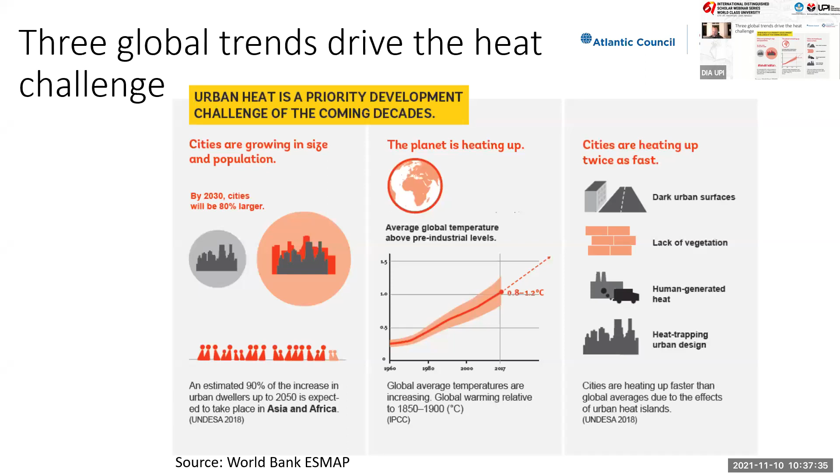And this lack of access to cooling, and by lack of access to cooling, I mean two things here. First, there are those that are economically able to purchase an air conditioner and run an active air conditioning unit, something that takes electrical power to operate. And in that category of access, we face one particular challenge, and that is powering those units going forward.

You can see here, this is the projection for the global air conditioning stock that was developed by the International Energy Agency in their Future of Cooling report. And to meet the demand, if we were to actually install this many air conditioners over the next 30 years, we would need to build the electrical generation capacity that we currently have in the US, Europe, and India combined. So we're talking about a multi-trillion-dollar set of investments to simply meet the expected demand for air conditioning units that we have currently.

And that's if you're lucky enough to have the economic capacity to buy and maintain and operate that air conditioning. On the other side of the equation, we have those that are not economically able or don't have access to stable electrical power to operate active cooling systems. And here we're talking about over 1.1 billion people who don't have access to those solutions and will need some other sets of solutions available to them to survive and thrive where they live. And for that, we mean most likely passive cooling solutions.

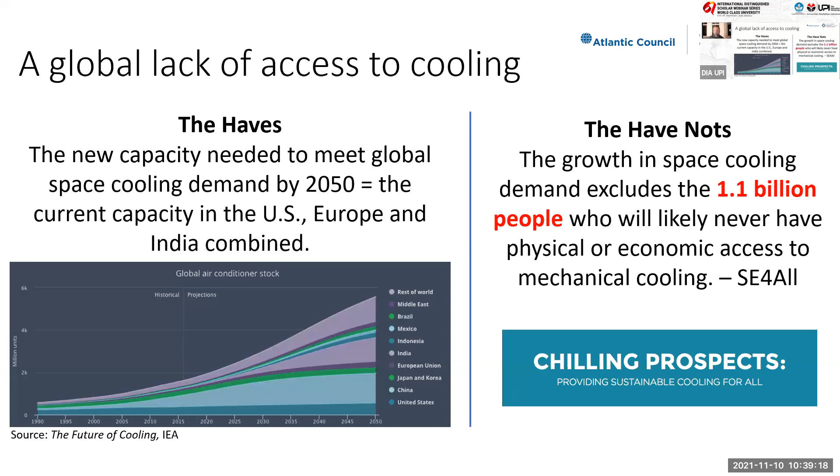So it's a huge global problem, and it's also a dire one from a couple different avenues. And so I'm going to talk through a few of these particular challenges that heat generates. But I want to make the general point that if you think about an urban system or a community system or a human system, there aren't many systems that we deal with on a regular basis, in our economic system, in our agricultural processes and so on, that rising temperatures and extreme heat aren't having a negative impact on.

So I'm going to focus on a few, but please keep in mind that this is about as broad a spectrum of a challenge as we face in the global context today. So I'm going to start with the sort of economic piece of this. And this is from, on the left side here, a report published in the journal Nature Climate Change back in 2017. And you can see the title there.

And it was a really comprehensive review of close to 2,000 cities around the world. And what they looked at was the cost of unchecked urban temperatures and local climate change impacts. So essentially, what is the cost to not doing anything on heat? And what they found was that by 2050, the median city in their study would face about just under 2% GDP. It would cost them 2% of their GDP annually to deal with the lack of action on those challenges.

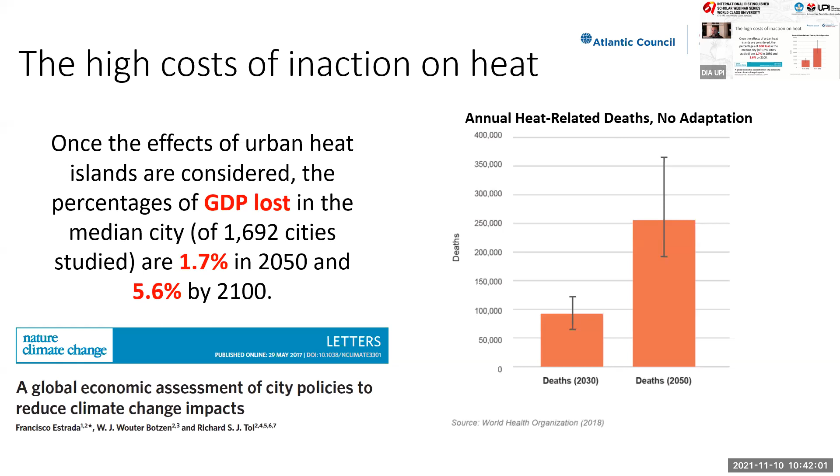So just to frame the top line of this, I also want to talk about air quality, since that's a big piece of the health component here. If we think about how air quality is impacted by heat, it hits in two different ways. The first is higher temperatures increase demand for active cooling, air conditioners, and other sorts of space cooling measures, which in turn increases electricity demand. So depending on the mix of electrical generation, this will increase the emissions of ground level ozone, sulfur dioxide, nitrogen oxide, carbon monoxide, and a variety of fine particulate matter and other pollutants.

And to the extent that those generation facilities are closer to cities, those impacts will be worse. This effect on air quality is most pronounced in cities where that power generation is close to them. Heat also helps activate some of these precursor chemicals in the atmosphere. So you see more smog being formed and more ozone being formed on hot days than you do on cool ones. The other aspect of this is urban design that blocks wind.

So one of the key factors driving urban heat islands or elevated temperatures in cities is the fact that we are blocking wind with our human development. We build tall buildings that block the wind. Therefore, we slow down the wind within the urban core, and that makes it harder to move the air out of the urban core and into areas of lower concentrated population. And so these two factors together, one in direct relation to heat, one a factor that causes urban heat, are two major reasons why we see air quality being reduced as a result of rising temperatures.

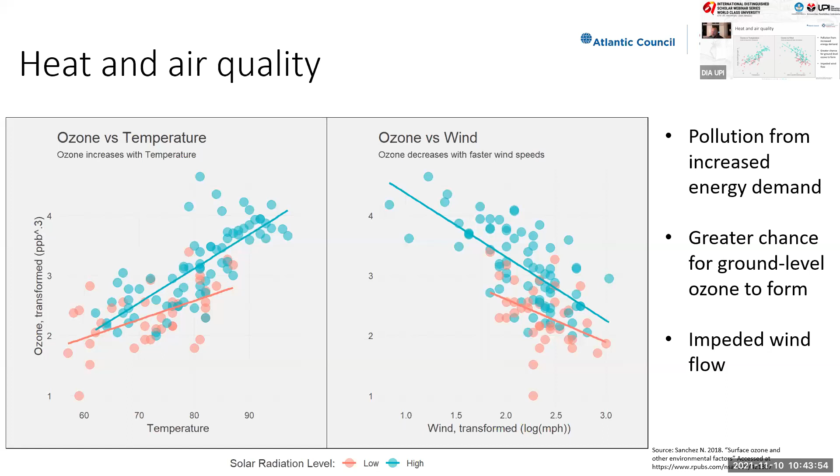Okay. So I also want to talk about the energy system. What you're seeing on the left here is a graph from Shanghai, but any city that has substantial air conditioning penetration looks very similar to this. And what you're basically seeing is around, in this case, 23 degrees Celsius. Now that threshold will shift depending on the city, but generally in that range of about 19 degrees Celsius up to about 23 degrees Celsius, you've got a fairly flat use of electricity in the average city.

Sometimes you do have a little bit of a bump towards the lower end if the city is a cooler climate. But right around that 23 degree threshold, we start to see rapid increase in air conditioning use and therefore energy demand, electricity demand.

And as you can see here, as excess urban heat gets more intense in the coming decades, the electricity demand in cities will grow and affect electricity costs and system efficiency. And going back to that IEA report, The Future of Cooling, by 2050, we find that up to 40% of peak load in places like Indonesia, as you can see circled in red here, will actually be from cooling. So this will be a major piece of the electrical infrastructure challenge that Indonesia and others in South Asia, including India, will face going forward.

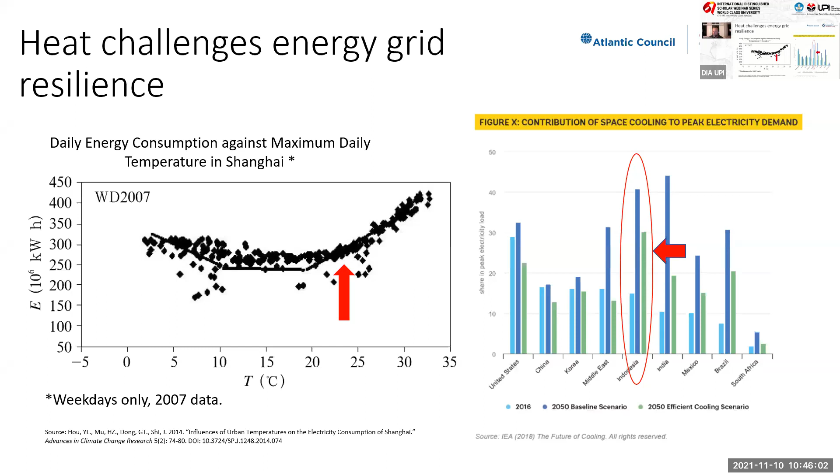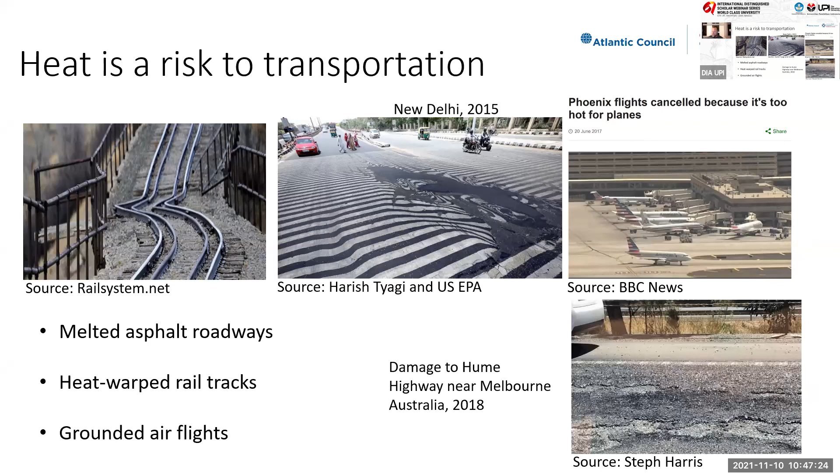And throughout this, the items I've highlighted here and the broader spectrum of economic and health and other implications, I want to be clear that this is an asymmetric impact. It's not happening to everyone equally. It is primarily affecting those that are most vulnerable, those that have the least resources and capacity to adapt to these higher temperatures. And so this is also, among other factors, driving global inequities, because the impacts are being faced most by the people who have the least capacity to absorb them. So as we're making changes in our built environment to address this, we're also indirectly and directly shrinking that inequity gap that we have in every country around the world.

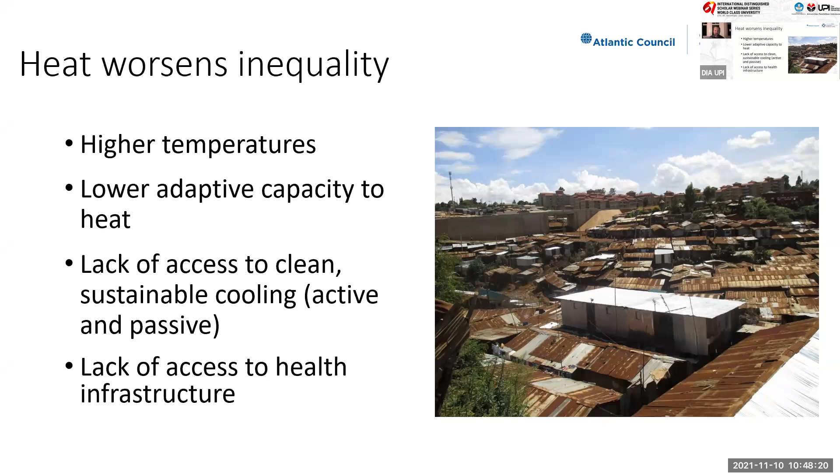So I now want to turn to the good news portion of what I wanted to say today, and talk a little bit about the cooling strategies that are currently available to us. And before I jump into that, I want to make the point that many of these strategies are based in ancient practices. They have modern application and they have modern technology that supports them. But many of these are part of the way we used to build our communities and build our cities, adapted for the modern age. And so we're in some ways coming back to a building style that served our ancestors well.

And I also want to point out that I'm going to be talking mostly about those higher tech solutions here, but that within each of these categories, there are often local solutions that can be adopted that serve the same purpose. So as an example, when we are talking about a cool roof or lightening the color of a roof, we're often talking about certain coatings and certain high quality paints or other types of applications to the roof. But you could also include a lime wash that you replace every year, or in India, for example, the use of cracked porcelain to help reflect the sun's energy. So while I may be covering more general technologies in this space, in many cases there are vernacular and traditional options that are available that are often less expensive that are important and applicable here.

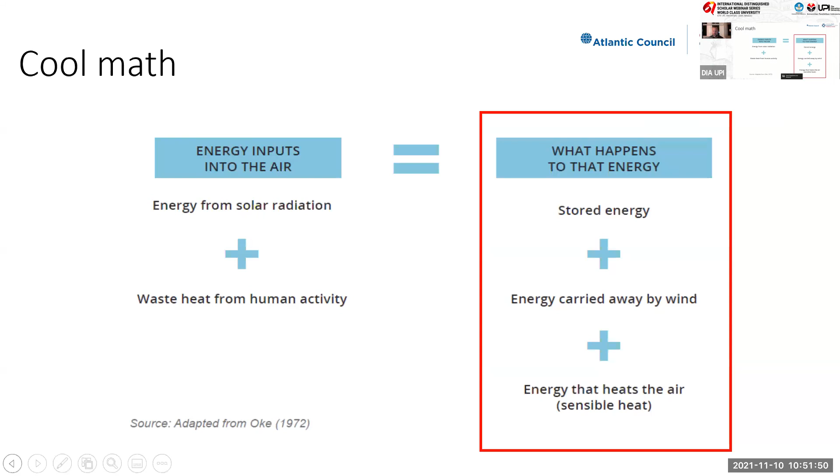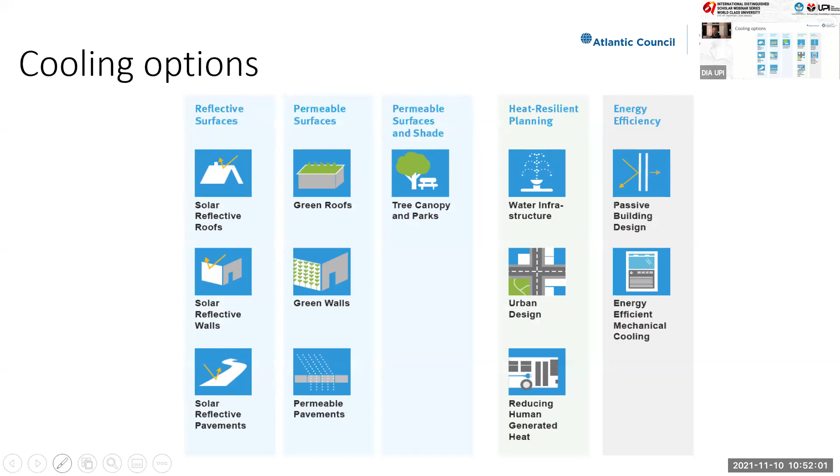And so again, I want to highlight a few of the measures that we have out here, and I'm going to break them into two major buckets. The first is, here we go, what I'll call passive or non-mechanical cooling solutions. Just the other day, I heard someone describe this a little differently, and I actually like the way they described it. So one other way to think about this is, what could we do outside of our building to improve the inside of the building and the urban air temperature? And then we also have the active cooling, which is what we can do on the inside of the building to improve its thermal comfort.

And so in the context of the first section, the passive, or let's say outside cooling solutions, we've got a number at our fingertips here. First is increasing the ability of our urban roofs, walls, and pavements to reflect rather than absorb solar radiation. That's what we're calling reflective surfaces. We can increase the amount of vegetated cover and tree canopy, which is the shading and permeable surfaces there in the middle box. We can increase the number of and accessibility to natural and man-made water features, either through fountains or by revitalizing or utilizing existing natural waterways, which is listed here as water infrastructure.

And then finally, on the passive side, thinking about our urban design. So designing our urban spaces so that they minimize heat buildup and heat retention, and maximizing wind flows through our cities, and calling that here urban design. Another piece that I included in passive design is related to energy efficiency, and this gets to some of the challenges that we see with increased electrical use, and helping to minimize that need to turn on that air conditioner that would then drive waste heat and additional greenhouse gas emissions.

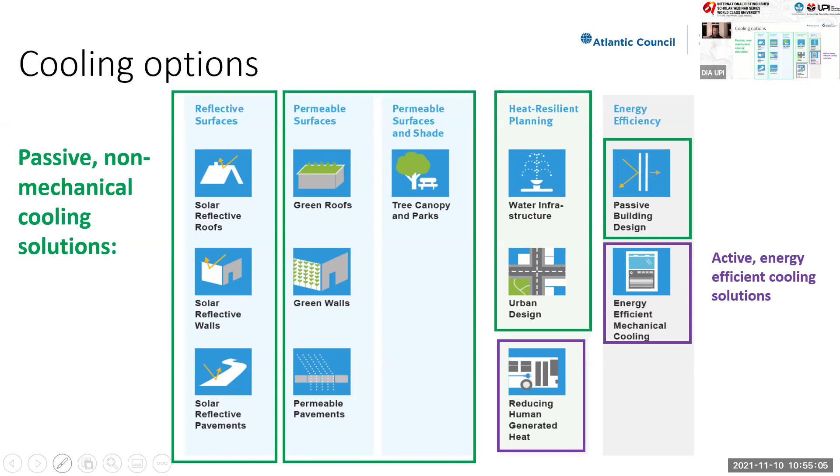So I won't go through each one of these here, but just to say this is drawn from the primer on cool cities that was mentioned earlier on. There's a couple points I want to make here, though, at the general level. And the first is that these solution sets are common across the world, that this is sort of the menu of solutions that we're going to be building our local cooling strategies around.

That said, each of these is going to be more applicable in certain areas than others. And so the mix of these solutions will differ by location, in some cases even within a city. So I think we understand at a broad scale what the opportunities for cooling are, what the solutions for cooling are, but then there is still a need to understand what is the right mix of those solutions to apply in our communities. And I'll talk a little bit about those considerations as we go.

But one thing I do want to point out is that no matter where we are, in humid tropical areas, in dry desert areas, in a four-season climate where you have a cold winter and a warm or hot summer, these solution sets apply. They all have different performance levels, but they will generate cooling benefits in each of those different varied climates.

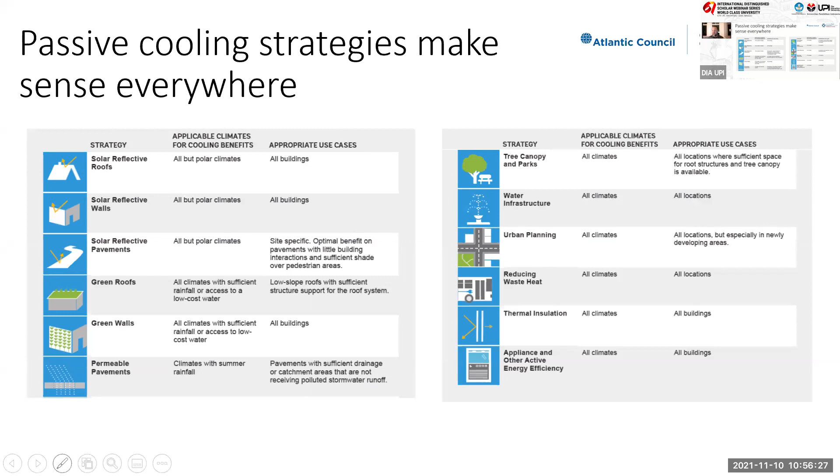So now I'm going to just take a little bit of a deeper dive into each of these opportunities and how they work. So I'm going to start with this idea of solar reflectivity. And so the concept of creating cooler structures using the surface's ability to reflect sunlight and to efficiently emit the absorbed heat was applied on buildings going back thousands of years. There's examples of this in ancient Sumerian architecture, ancient Egyptian architecture. Certainly, if you've seen any photos of the Greek islands and the buildings built there, you'll see it there too. So this is one of those ideas that is not new as a concept.

And this is how it works essentially. So every opaque urban surface, the roof, the wall, pavements, they reflect some incoming sunlight, and you can see that here, this little bar. So in a dark roof, the portion of sunlight that's reflected is relatively small. And when it is reflected, it is reflected out into the sky and ideally through the atmosphere and into space. And so this is essentially reducing the amount of the sun's energy that's absorbed and turned into heat, if you will.

And on a dark roof, we can see that actually two other things will happen relatively more frequently here. The first is that solar energy will be absorbed on the surface of the roof and then be re-emitted as heat that will warm the building, warm the area around the building, and warm the atmosphere above the building. And there's a wide variety of interactions that occur here, but essentially those are the pieces that will happen into the ambient outside air as a result of the solar energy being absorbed.

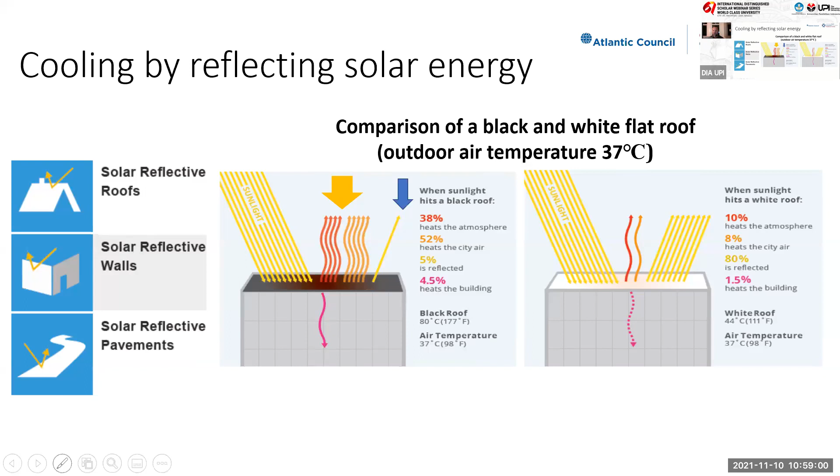And so the idea behind increasing reflectivity is to get to the graph on the right-hand side, which is to say the same set of interactions, reflectivity, absorbing and re-emitting into the air, absorbing and emitting into the building, but we're increasing the relative amount of that solar energy that's being reflected out into space rather than affecting the local area. And this can have substantial benefits that we'll talk about in later slides here. In fact, we'll talk about it in this slide.

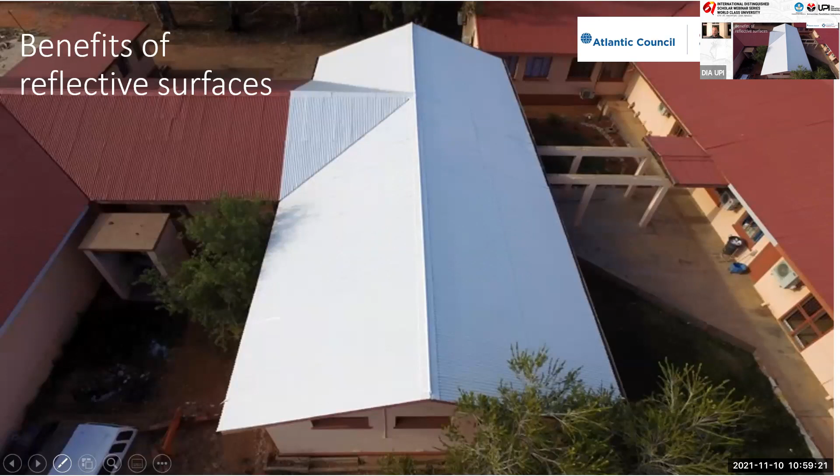So what you're seeing here is a school in Northern Cape Province in South Africa in a community called Kais. And so I want to talk a little bit about just in general what we see as the benefits, and they really span from the building scale all the way up to the global scale. So the first is reflective surfaces are applicable on nearly every type of roof, whether it be steep or flat.

There is some alternative roof that can be made cool or made reflective, with the exception, I believe, of thatched roofs, which are already cool, at least for the inside. But for just about every other type of roof, whether it be metal, asphalt, tile, there are options that can make that roof cool.

When we have active cooling, in all but the coldest climates, solar reflective roofs can reduce the net cooling energy demand by between 20 and 40%, and potentially more if they're paired with cool walls. And you can actually see at the very bottom of this picture that this structure has, at least in some cases, light colored walls as well.

So in warm US climates, we found that cool walls lowered annual heating and cooling energy costs by about 8.5%, which is a little over $1 per square meter in single family homes, and just about $2 per square meter, or 4.2%, in medium-sized offices. So these can be substantial benefits in terms of energy savings, and these apply even into colder climates in the US and elsewhere.

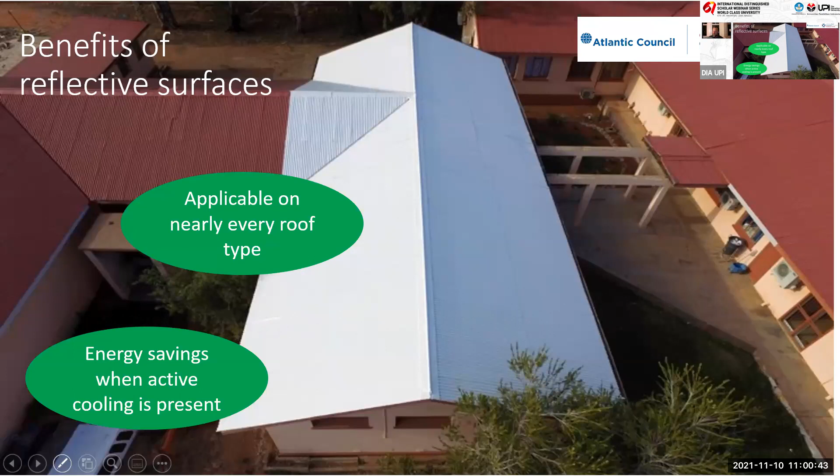So in terms of the cost effectiveness, the primer actually has some updated numbers from around the world in terms of cost, and I think Professor Paramita could probably speak to this with great accuracy for Indonesia. But what we find is generally for almost all of the cool roof options, the upfront cost premiums, while they'll vary, are fairly low. Although I will say in new markets, these cost premiums are still a challenge. But as we see more and more adoption of cool roof policy and others, we've seen steadily that costs can come down to being neutral with existing solutions, or in some cases actually less expensive than existing options.

In general, what we see in a developed market for cool roofs, like Australia, Europe, North America, is that the payback for applying a cool roof is anywhere between 0 to 6 years, based on the energy savings alone, not even looking at the other broader societal benefits, or even in some cases valuing the peak demand benefits in the electricity. So this is really just looking at demand reduction overall.

And I alluded to global cooling, and so I want to explain that briefly here. A large-scale shift towards reflective surfaces could immediately cool the world by reducing the amount of heat that is transmitted from the Earth's surface and trapped in the atmosphere. So basically taking the method by which reflective surfaces cool and translating that into the amount of warming that is generated by atmospheric greenhouse gases. So if we're considering changing a dark surface to a light surface, that cooling effect can be thought of as equivalent to a warming effect from greenhouse gases that have already been emitted.

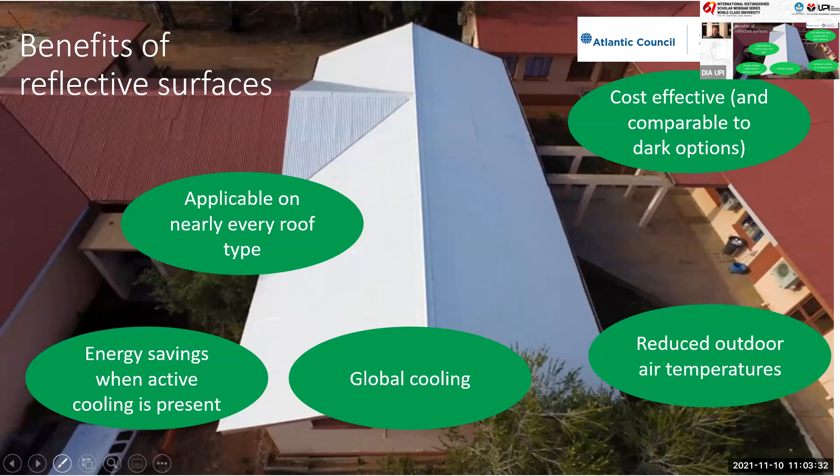And finally, reduced indoor and outdoor air temperatures. I want to make sure I get both of those on there. We talked a little bit about that in terms of the numbers around this. On average outdoor air temperatures, in studies that we've seen, for every 0.1 or 10 percentage point increase in reflectivity, we can reduce outdoor air temperatures by about 0.3 degrees Celsius. And to give you a sense of what a 10 percentage point increase in reflectivity looks like, that would be a change from a dark gray to a slightly lighter gray. This is not going from black to white.

So when we look at this overall in the cities where this has been studied, a reasonable deployment of cool surfaces in a city, by that I mean not the technical potential, but what can be done realistically, could reduce urban average temperatures by about 1 degree Celsius. That may not sound like much, but that is a substantial amount of cooling when you consider that against the warming that has occurred on the global average basis. We're a little over 1 degree Celsius now.

So reducing our urban temperatures by 1 degree Celsius on average essentially, and again, this is rough terms, essentially negates the effect of warming that we've felt over the last 100 years since the Industrial Revolution began. So it is very substantial.

And then the other piece of this that's important here, this 1 degree, and why it's an important number, is that when we think about the effects on the energy system, the effects on the health system, and the effects on air quality, as you saw, they weren't linear. They get to a particular threshold, and then every degree change over that threshold temperature is a substantial increase. So once we're over that threshold temperature, these types of reductions have an outsized benefit in the communities where they've been applied.

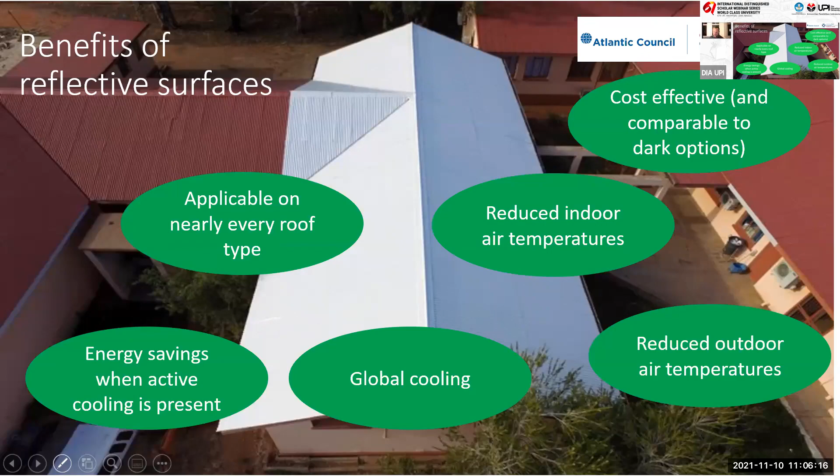Now, of course, as I mentioned a couple slides ago, there are always use case considerations to think about here, and that's certainly true for solar reflective surfaces. The first is, especially in cooler climates or four-season climates, you can have some additional heating demand that's generated as a result of applying cool surfaces. So you're cooling in the summer, but you're also cooling a little bit in the winter. This, generally up into the very northern Arctic parts of the world, is still a net cooling benefit from solar reflective surfaces; you get more of the benefit from reduced summertime temperatures than you have penalty in the winter. So this is generally an overstated challenge, but is one to consider depending on where you're applying these.

The other aspect here is the reflectivity of a surface changes over time. So the surface gets dirty. There's biological growth that can occur. Dust from sandstorms, things like that, can reduce the initial reflectivity. So what we see in international codes that have mandates for reflectivity, in some cases they actually specify an aged value rather than an initial value to capture this.

What we generally see in the U.S., where we're looking at biological growth, industrial emissions and their effect on the roof, and desert conditions, is about a 25% reduction over about 3 years. And then it stabilizes after that. So as a rule of thumb, you could consider about 25% reduction if the roof isn't regularly washed, or, which we actually see more frequently, if you have rains that come through on some basis, that will generally clean the roofs as well. So you may not lose as much if you've got an area with regular precipitation.

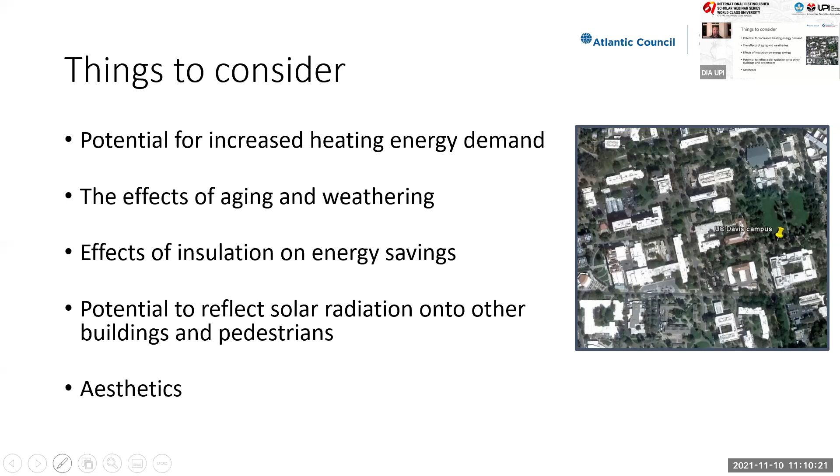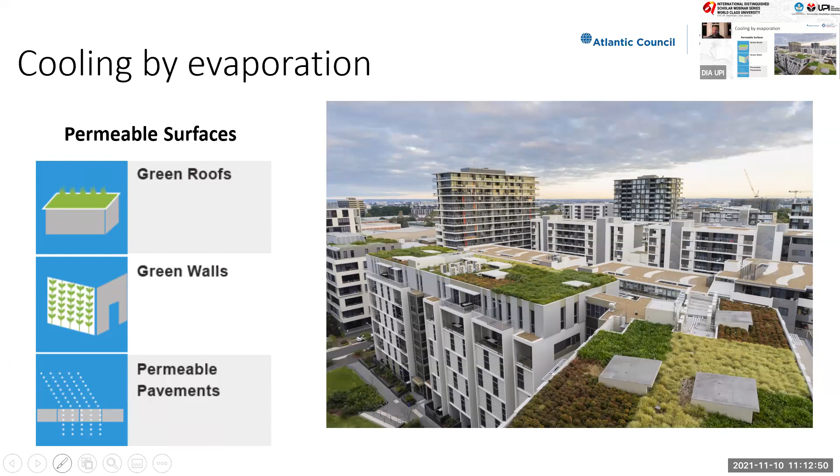So we'll get to this in the consideration section, but there's obviously a number of things to think about as you're planning out a green roof or a green wall. And we'll get into that in a few minutes. But plant selection in this context is I think particularly important, especially given the fact that we're living in a changing climate. And the plants that are appropriate today may not be appropriate in 20 years due to climate change and due to the conditions that we'll be facing in our urban spaces.

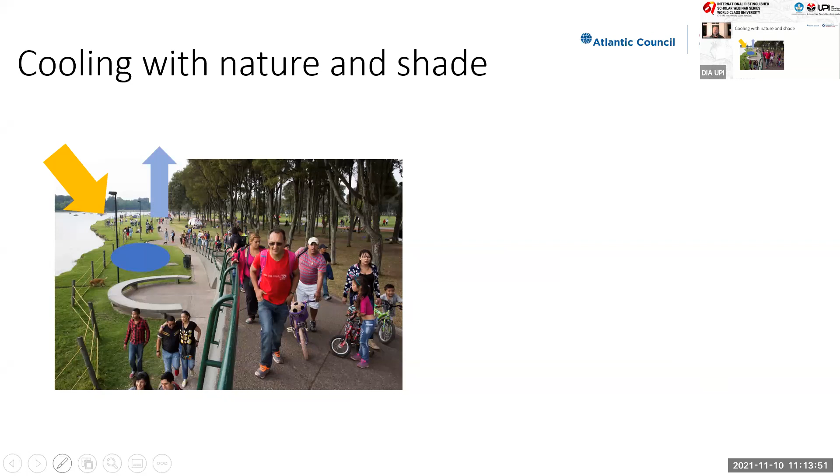So this lowers air temperatures and it increases the moisture content of the air. So we're lowering temperatures and we're seeing an increase in humidity as well. Now, obviously, increasing urban tree canopy is a common solution. It's certainly the most popular solution that we see cities looking to adopt in terms of replacing lost tree canopy, both in terms of street trees and in terms of on private space.

We can get into some of the benefits here in a second, but this is certainly, I'd say, of all of the solutions we're talking about, the one that we're seeing cities most focus on in building out their solution sets for urban cooling. And again, this is not just building new parks or huge park areas, although we do see some of that. It's being creative about using small spaces for parks.

So as an example here, Seoul, South Korea created 1,000 new parks over the course of a few years, simply by looking at small urban spaces that can be turned into small stands of trees and other types of vegetation to generate local cooling benefits. Rather than having an entire huge park area, they created these many different park areas, which also had the benefit of spreading out the benefits of those trees to a wider set of the population. And so there are a wide variety of creative and interesting ways that this is being done globally.

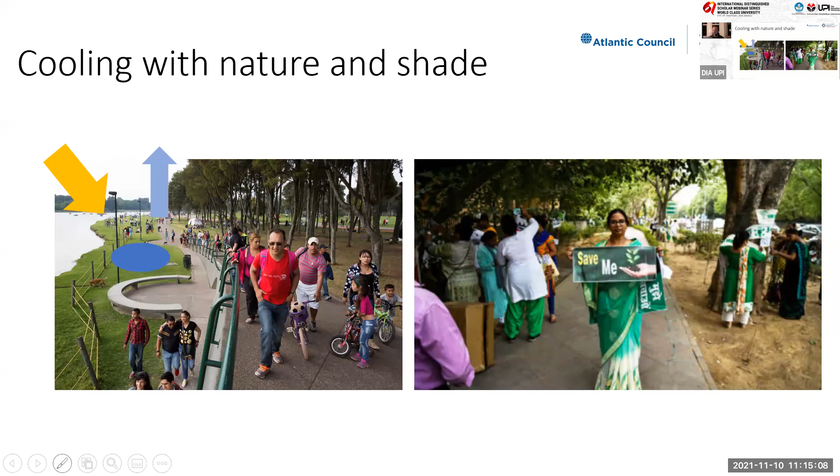So the benefits of natural solutions, and here I'm going to cover both trees and vegetated surfaces together. So they generate, like I said, a huge variety of benefits that go beyond cooling. But let's start with energy savings and reduced indoor air temperatures. We found in studies that the insulation and the shading generated by green roofs and walls reduce cooling demand in buildings by up to 40%, between 15 and 40%, and help reduce indoor air temperatures. Like I said, with the insulation value, you're getting two benefits in one with a green roof and a green wall.

In terms of outdoor air temperatures, green roof surface temperatures can be reduced by 17 to 22 degrees Celsius compared to what you see on a conventional dark surface. So it's a substantial surface cooling benefit. And they can reduce air temperatures by between 0.3 degrees and 3 degrees Celsius when deployed at scale. So this is a potentially very potent urban cooling solution set.

When we look at comparisons of temperature within more dense urban forests and non-green urban sites, we've also shown lower temperatures in the forested sites that can be up to 10 degrees Celsius. So urban parks not only are helping generate more average cooling, but they can be areas of respite on our hottest and most dangerous days. They can be accessible to a wide variety of people if they're placed in strategic locations. A row or a concentration of trees can reduce average daytime temperatures by between 0.5 degree and 2 degrees Celsius. So even a smaller deployment can have substantial benefits.

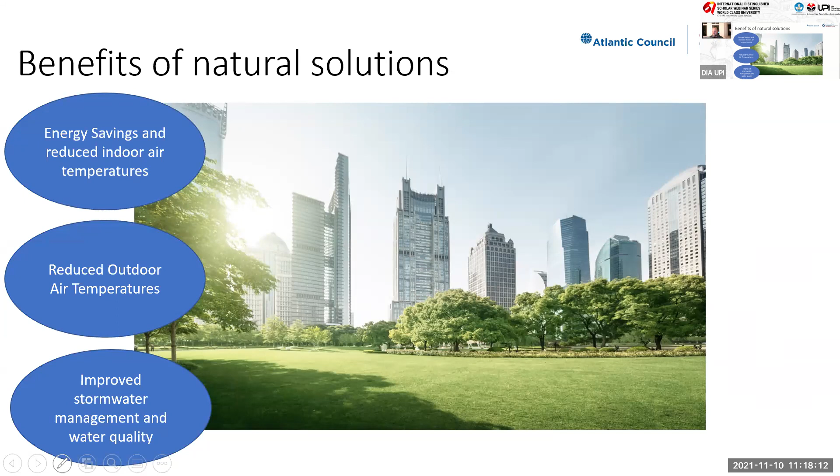There's obviously aesthetic value, as you can see in the picture. Many of us find green spaces to be very calming and relaxing and want to be there, and they can be iconic spaces in our cities. Think of Central Park in New York, for example. And we've seen in studies from Australia and elsewhere that an increase in green space also has a commensurate increase in property values in the areas around those installations.

Opportunities to increase or enhance biodiversity are certainly a part of what we see, not just in terms of allowing more species to grow, but we're also seeing cities being very thoughtful about creating natural lanes, both through ground-based park space, but also on living walls and in green roofs that allow fauna in particular to move through the urban space in a less obstructed way. So I call that enhanced biodiversity, not just increased biodiversity. Trees and green space obviously capture greenhouse gas emissions.

And excuse me, here we go. We actually see that when paired with solar photovoltaics, there's some studies from the US, the University of Kansas in particular, found that the cooling effect of the green roof actually helped improve the electrical efficiency of solar panels, not by a huge degree, but by a few percentage points. And so thinking about these as integrated solution sets can be valuable, especially in an environment where we're trying to build more renewable energy in our cities.

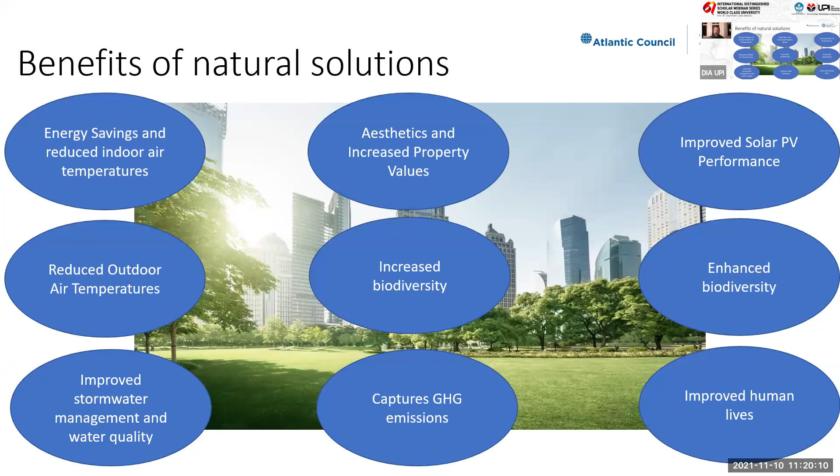I talked about the enhanced biodiversity already. And just generally the improvement to human lives. I think we're talking a lot about the sort of scientific and technical benefits, but as we think about beautifying our spaces, creating spaces that we want to be in, that we want to move through, there's a spiritual value to that, and there's a mental health benefit to that.

And I would point to, as an example of this, the work that's been done in Medellin, Colombia, where the city has invested in not just enhancing green space, or bringing back green space that has been lost or that has not been managed, but using that as an opportunity to physically connect communities that have been separated by gray infrastructure development.

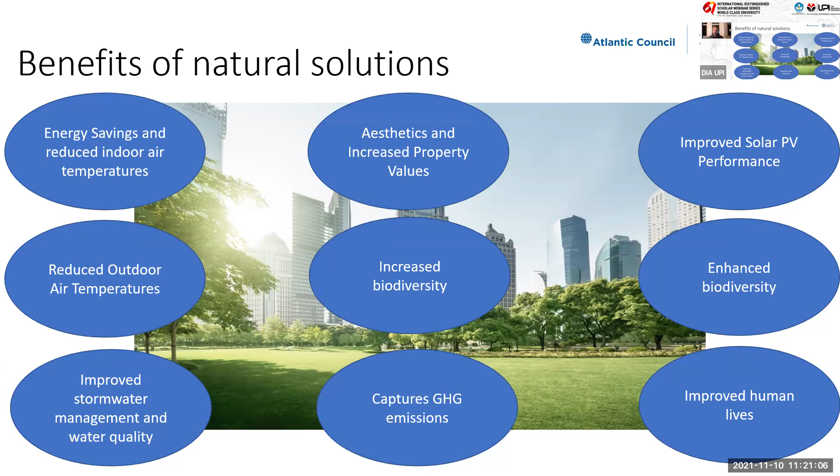And what that has led to is greater interaction between communities. It's created greater civic engagement between these communities. It's created opportunities for urban agriculture and bringing people together in a way that didn't exist prior to that. So it's harder to create an economic valuation on that, but there are certainly huge human life benefits and quality of life benefits that can accrue from these solutions.

And again, here are considerations to think about as you're considering green infrastructure. In particular, here I'm talking about green roofs and walls. Certainly, the building you're putting it on matters. The structure has to be sufficient to support it, to support the design that you're planning. In environments where it's very dry or very arid, or where precipitation is infrequent, water usage is going to be a critical piece of this.

What we see, for example, in Phoenix, the investment in green space and green roofs is far less than what we see in, say, New York City and Washington, D.C., which have more rainfall to feed that. And this is particularly important in the first 3 to 5 years of the roof's life. So you may need to even physically get up on the roof and irrigate it in some cases, if this is the choice you're making. So that's something you have to consider as you're planning this.

I mentioned that the evaporative cooling or evapotranspirative cooling has 2 impacts on the air. It can lower the temperature, but it also increases humidity. And so when you think about the apparent temperature, the temperature that a human actually experiences, the temperature that drives their health outcomes, they're benefited by a reduction in the air temperature, but some of that is given back in an increased humidity. And so while in almost no cases does the humidity increase override the benefit from decreased temperature, it's something to consider when you're evaluating the different measures you're looking at.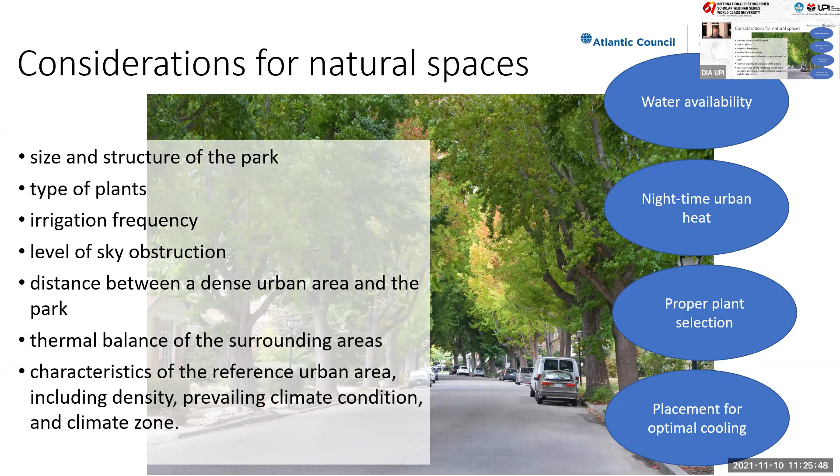And we've talked a lot about what I would call sort of technical measures or adoptable measures, but there's also differences in how we design our urban spaces. I can go through each of these on the left, but as you can see, there's a number of different ways to design our built environment. And most of these get to one key aspect, and that is, how do we make sure we are maximizing the natural wind flows through our cities and maximizing the wind flows from cooler spaces into warmer spaces?

And so that can be improving the wind flow that's coming off of a body of water into an urban space. It's allowing lanes for wind to move through. It's thinking about the positioning and orientation of our buildings so that wind can more easily move through them, even if they're tall buildings. It's the design of certain buildings, so incorporating ventilation into the building design itself that can allow that wind to move through, even if the structure itself is monolithic.

It's reducing that monolithic wall space. It's allowing more setbacks off the roadway, so that instead of having structures that are overhanging, they're set back. This allows heat to escape more readily and then also be blown away more readily. And this also similarly with sort of stepped building height profiles.

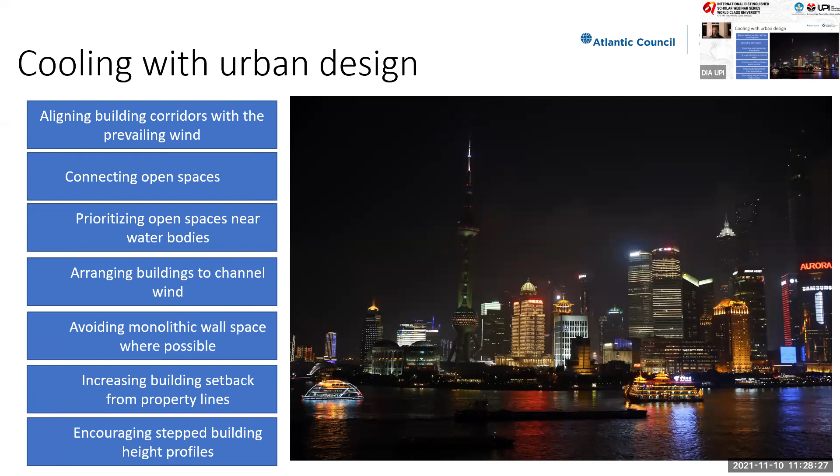Okay, so I'm going to shift over to the benefits of cooling strategies and why these make sense to do. I've talked a little bit about these benefits in the individual cases, and I want to talk about it here through a particular lens of the Sustainable Development Goals. So as I mentioned, we've looked at the broad spectrum challenge of heat and the different aspects that it affects. Cooling those spaces, cooling our communities, cooling our buildings has an equally broad set of benefits.

I think those benefits really accrue in four main SDGs. The first is SDG 3, which is good health and well-being. And this accrues from better air quality and reduced heat stress, as a major supporter for human health. SDG 10, reduced inequalities. As I mentioned earlier, the impact of heat is felt predominantly by those that are most vulnerable.

And so a dollar invested in reducing urban temperatures or building resilience to heat is a dollar invested in reducing inequality. SDG 11, sustainable cities and communities. Again, we're improving the livability, the prosperity of communities by making them greener, by making them cooler.

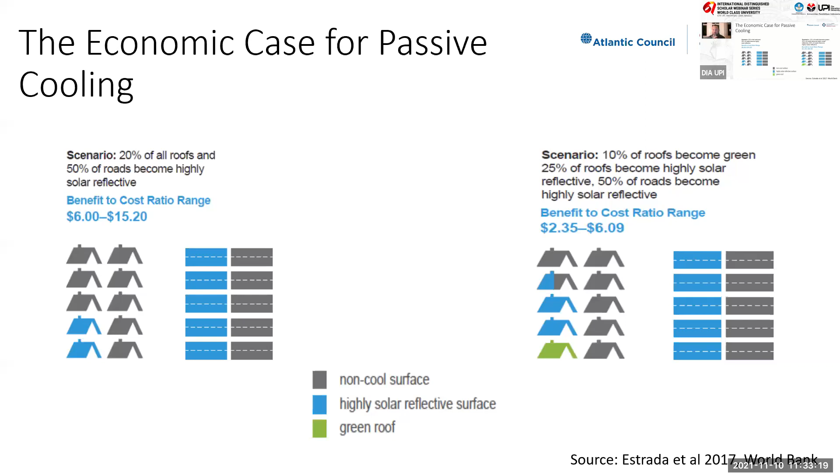So the benefits that we're seeing accrue at a rate of about 12 to 1. So $1 invested in passive cooling can generate 12 or more dollars in economic benefits. I've talked about some examples from around the world, so I will skip over those and just focus on a couple of overarching things that we're doing at the center that may be of interest to you.

And the first is, one of the main challenges we see is the lack of unified governance around heat. Heat's interspersed throughout a city because its challenges and benefits are interspersed. And so we're working to create chief heat officers that can coordinate action on heat within city governments. The first 3 have been appointed this year in Miami-Dade County, in Freetown in Sierra Leone, and in Athens, Greece. And these are real opportunities to drive big projects that have benefits.

Each of these will look a little different in how they operate, but ultimately it will be focused politically and also from an implementation perspective. And then also raising awareness of heat as an issue by instituting a heat season, just like we have a typhoon season or a hurricane season. And so Seville, Spain, and Los Angeles and Miami and Athens will also be adopting an official heat season.

And I mentioned earlier the Million Cool Roofs Challenge, so I won't spend much time on this here, but just to say that program has just wrapped up over 18 months, including the entire period of the pandemic. That program to build champions and supply chains, including in Indonesia, generated 1.1 million square meters of new cool roofs.

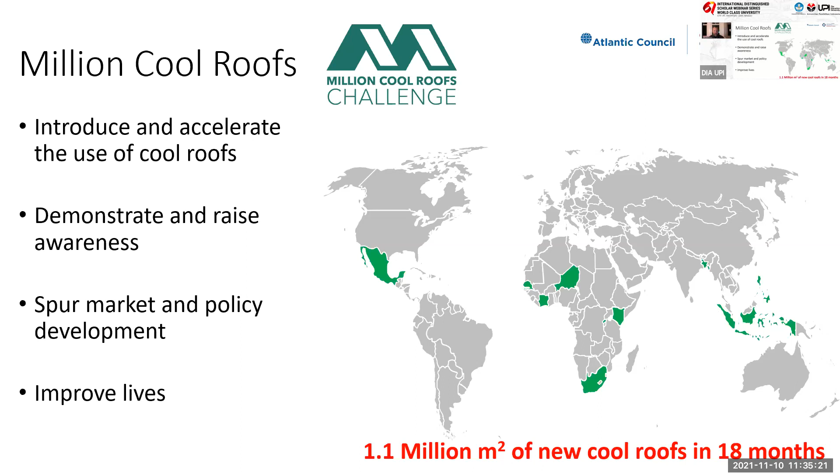And by the way, in most of these countries, cool roofs and cool products were not even available in the marketplace when we started this. So we went from literally zero to, and I say we, it's these teams, literally zero to pretty substantial deployment.

And I will end on a note of congratulations to you, Professor Paramita, for your work with Cool Roofs Indonesia. I won't go through all of these, but just to say the work that Indonesia has done in this space has been incredible, and you can see the benefits that have accrued across many of the different categories I've talked about here today. So I'll leave it there.

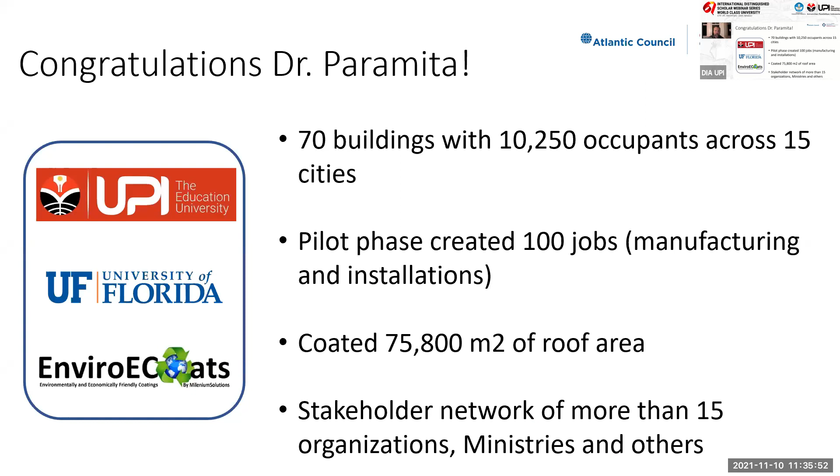Okay, thank you, Kurt, for your very nice presentation, insightful and very informative. It's very new for us about the cooling system, also about the passive cooling in your presentation. Now we are moving to the question and answer segment.

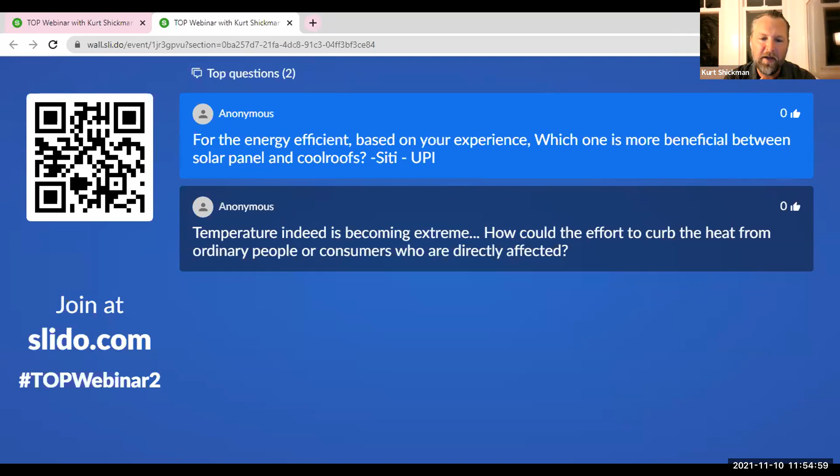Yeah, thank you. Yeah, for residential, I guess solar panel is still quite expensive. Perhaps another method will be much better compared with the solar panel.